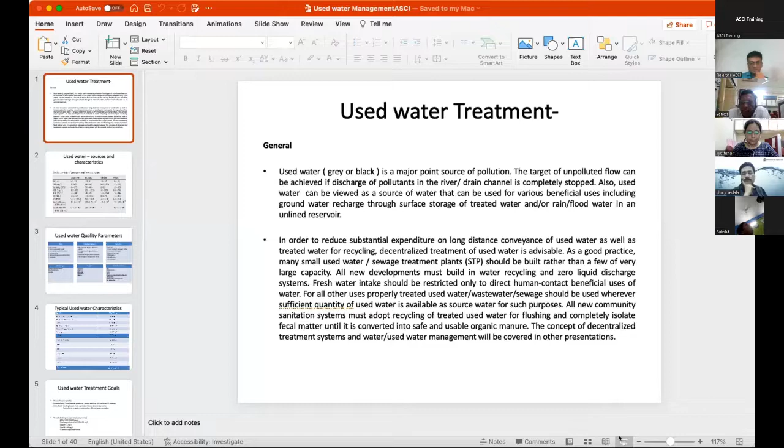What I would like to start my presentation with is that water is a very limited resource. The net water availability, as we see in the days to come, is reducing drastically. It is said that if water availability is about 2,000 cubic meters per person per annum, then we are in a water safe province. Unfortunately, most of us are coming into water scarce and severe water scarce provinces. More importantly, whatever good resources we have, we are converting those good resources into unusable resources because of pollution.

There are 400 lakes in the city I stay, Hyderabad, and none of the lakes are fit for drinking purposes because all the lakes receive a lot of grey water and black water. So it is very important that we stop this pollution and we work out ways and means of treating this water and reusing it.

Fundamentally, we cannot call used water as wastewater. It is also to be considered as a resource. Unless we increase the efficiency of water use, with this increasing population and water demand, we cannot meet the two ends. So it is very important that we treat the used water and reuse it, and preferably, depending on the situation we'll discuss further in the presentation, do it in a decentralized or centralized manner.

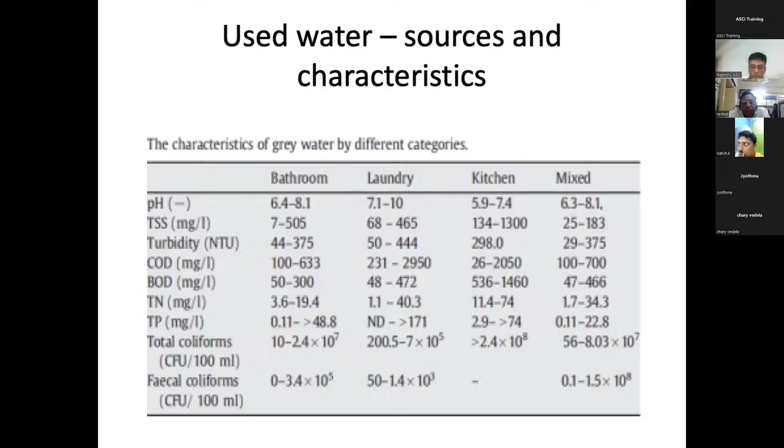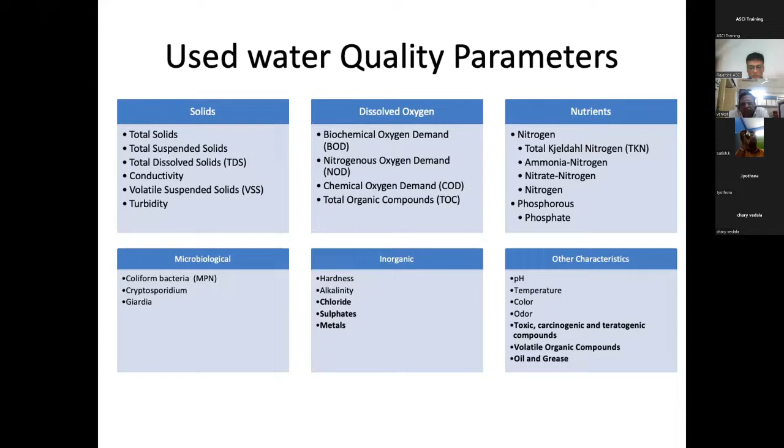Now, in used water quality, the basic parameters of concern - I will use the word used water both for grey water and the combination of grey and black water. Irrespective of that, the used water will contain solids, issues related to dissolved oxygen, nutrients which are also very important from the viewpoint of eutrophication into the final receiving body, microbial contamination, inorganic substances which are very important from the viewpoint of reuse and recycle because inorganics cannot be removed in the conventional treatment process, and other constituents like pH, temperature, odor, color. Not too much difference in these things when we talk about domestic wastewater.

So broadly, if I look into the used water characteristics, I've summed it up in this table, and as I said, the variation is quite large.

Even in a city like Hyderabad, with a population of more than 1 crore, I collected samples from different areas to check the quality of the sewage generated, and it is quite alarming. In some areas, the sewage has an organic load of BOD not more than 50 to 60 milligrams per liter, while in other areas it goes as high as 600 to 700 milligrams per liter. This is a function of the population of that area, the quantum of water supply, and the social lifestyle being adopted.

Now, what do we do with the used water? I have briefed it into two pertinent goals. The first goal is that used water is a resource, not wastewater. We should look into the reuse potential.

Wherever we can have decentralized facilities, we can use treated used water for purposes like toilet flushing, gardening, vehicle washing, groundwater recharge, or cooling tower makeup. In the community I stay, we use treated used water entirely for gardening and to a certain extent groundwater recharge. In a centralized treatment facility, it can be used for cooling tower makeup, especially near a major thermal power station, for industrial purposes, avenue plantation, irrigation, construction, and some aspects of groundwater recharge and recreation.

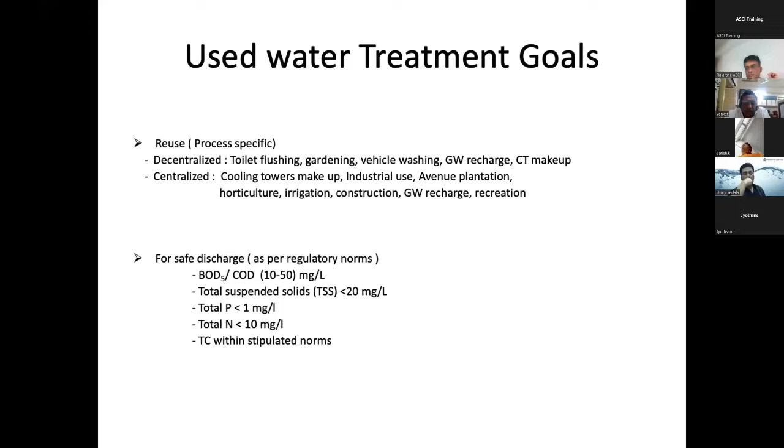There are no standards per se defining that water can be reused if it has this quality or that. I have collected information from different sources. Ultimately, when talking about used water for reuse, the paramount aspects are aesthetics: the water should not have any smell, color, or odor. Added to that, it should not contain any pathogens, and it should not contain inorganics which would result in scaling and other related aspects.

This may be too small for people to see on the screen, so I requested Professor Chary that if we share these things it will be clearer. By and large, used water after treatment can be reused at bulk scale in industry, in cooling towers at power plants, for groundwater recharge, and to a certain extent for recreational purposes. At smaller facilities, it can be given back to the township for toilet flushing, gardening, and related purposes.

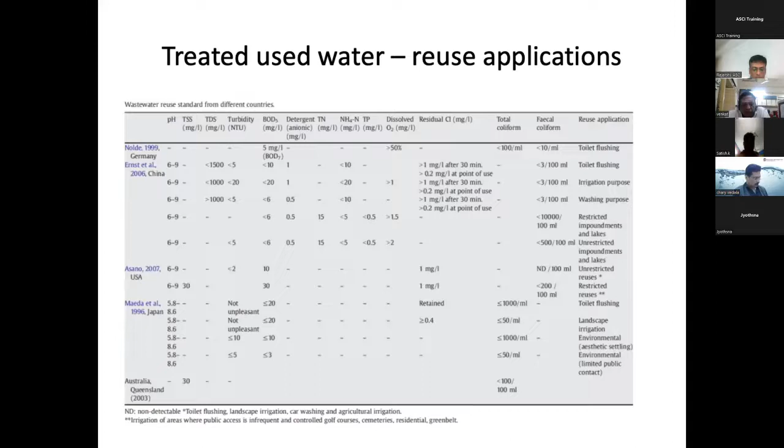However, there's always a stigma attached: people don't want to touch or reuse used water, despite its quality. I have asked several people, would you drink used water if I treat it to levels better than the drinking water you are getting? I always got the answer, mostly, no. But when I tell them that this used water goes into a river, and downstream the population uses it as raw water supplied for drinking purposes, they are a bit aghast—because people just think you open the tap, get water, flush the toilet, and the water goes away. Where the water comes from and where it goes is of little concern to most people.

This is a continuation of the quality of the water. I was looking at the new guidelines provided by the NGT, the National Green Tribunal. Looking at the parameters and characteristics specified for reuse applications, I find that the NGT standards are as stringent, or even more stringent in some cases, than most reuse potentials require. So in our country, if we follow what the NGT is saying, then by and large, most of the water, barring inorganic substances—meaning, in Hyderabad a few years ago we used to get groundwater...

And in groundwater, the TDS, hardness and other things were so high that reuse of that water for purposes like cooling or any other application where scaling is a possibility would have been very, very difficult.

Now, this is a small example I sketched during one of my projects. Normally in most cities, we have rainwater or stormwater drains being used for conveyance of sewage. There are houses near these stormwater drains, and most of them let out their wastewater into these drains.

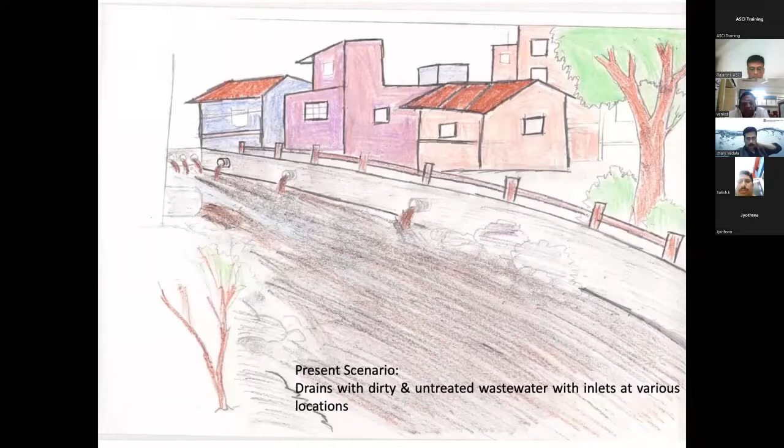So what happens is these drains become perennial drains. They carry wastewater not only during monsoon, but all through the 365 days of the year, and unfortunately, they're carrying wastewater. Because the drains are not properly lined and are not seepage-proof, this dirty water seeps through the ground and invariably meets the groundwater table. In the process, the hand pumps and other sources of groundwater in the near vicinity are all contaminated, and more importantly, the contamination is microbial, resulting in many diseases.

As a matter of fact, one study I was looking at a few years back said that more than 80% of hospital beds are occupied because of waterborne diseases like cholera, typhoid, amoebiasis and other related things. The cost in terms of man-days lost and treatment cost is so high that it has a very good payback period if we avoid this dirty water in the drains.

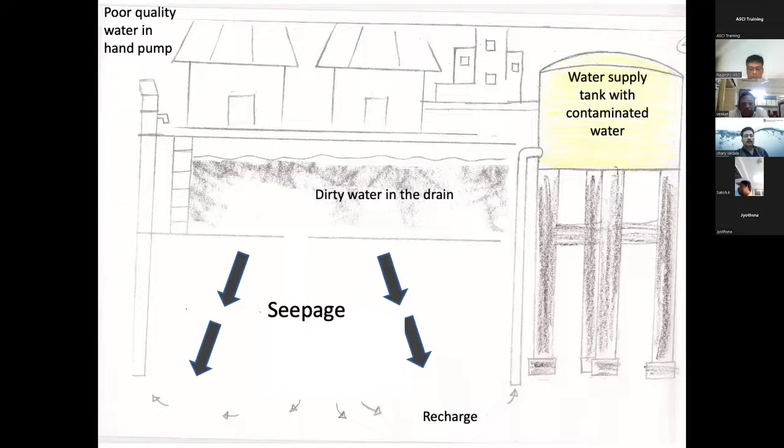And provide clean drinking water to the citizens. So what was thought is to have small decentralized treatment facilities along the drain, and put the treated water into the drain, and not let the untreated raw wastewater, gray or black water, go into the drain, by having some interceptions.

After every certain distance, based on the situation and circumstances, we again have a small treatment plant, and only the treated water is put back — that quantity which is over and above what can be reused and recycled within the nearby areas. So the stormwater would carry only clean water all through the 365 days of the year, apart from rainwater during monsoon.

Now, where to build the treatment plants, especially in urban areas, we have a lot of problems related to space, so different thought processes came in. We can build the STPs underground, like at some public place, and cover it with plantation and other things so it doesn't spoil the aesthetics.

Most of the drains are quite wide, and there's a possibility of constructing small STPs on top of the drain itself. And if there is land available, in a place like Kanpur under the Ganga Action Plan, it was also thought to buy away some of the area where houses are, and construct sewage treatment plants there — pay for it, it's still worth it.

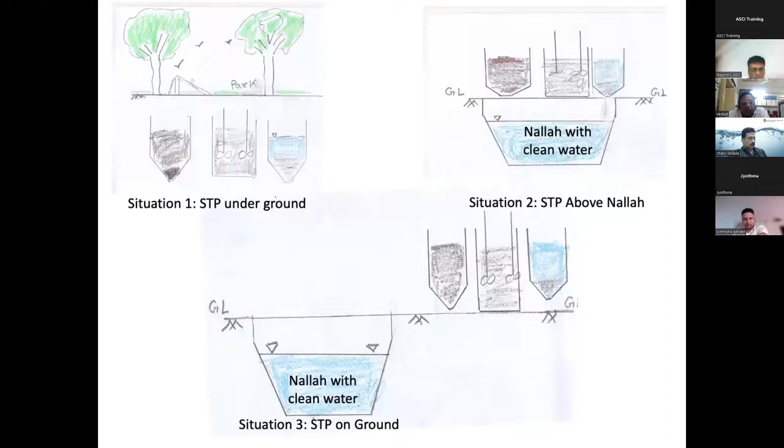The idea ultimately is that stormwater drains should carry clean water or treated used water all through the 365 days of the year. This water can also be accumulated in some artificial water body, or if there's a natural water body around, it can recharge the groundwater.

This water can also be pumped back to places like railway stations for washing of coaches, tracks and platforms. It can be sent back to industry, to power plants, because recycling water from a centralized facility back for toilet flushing and gardening at individual houses is not a practical approach at all. So we have to look into what type of reuse concept can be adopted.

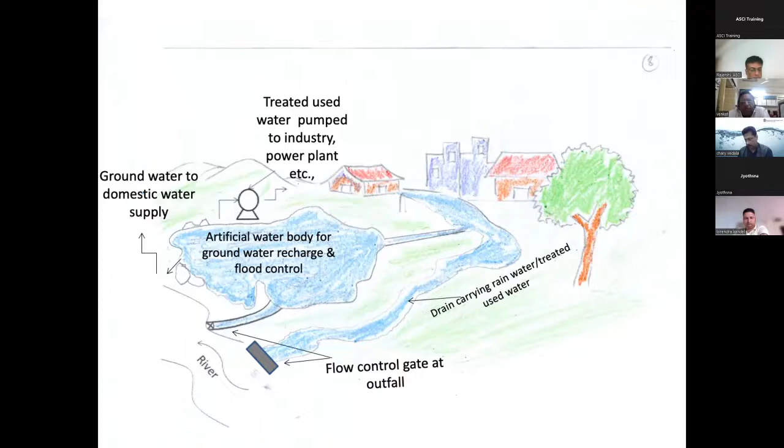And if we put treated used water back into the river, the river ecology and cleanliness are maintained, and downstream users are also happy in the process. So the reuse potential is at power plants, railway coach washing, industry, horticulture, irrigation, etc.

So ultimately, carrying out decentralized or centralized treatment will result in a clean and aesthetic environment all around, and health and related aspects show a lot of improvement, with overall better hygiene. So, as Professor Chary was saying, the major chunk of pollution that is conveyed with the used water should be avoided, and that can be done by providing adequate treatment.

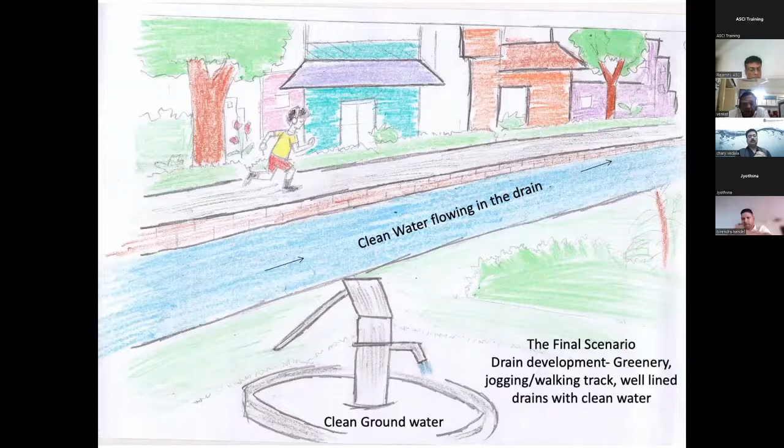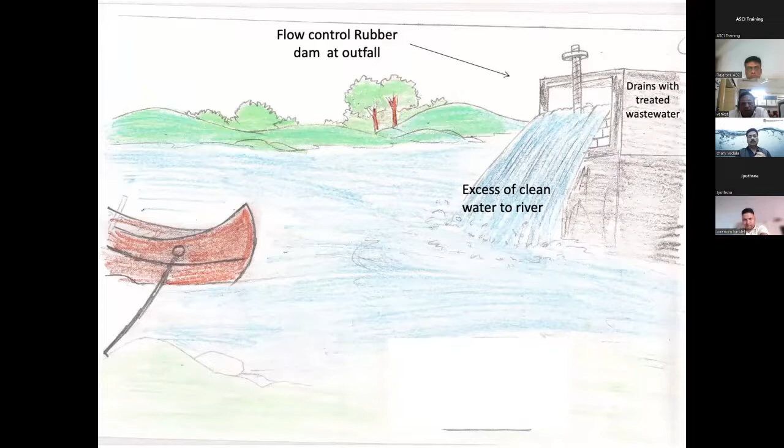Now, how do we select a particular technology or operation for used water? There are various parameters to look into. I can't say one is important and another is not — they all have an equal bearing. The quality of water, the quantity of water, the location where the treatment plant has to be established, availability of land, capital cost, recurring cost, the level of expertise required to operate such plants, and the reliability of the technology we are adopting, and so on. So there are various parameters we need to look into.

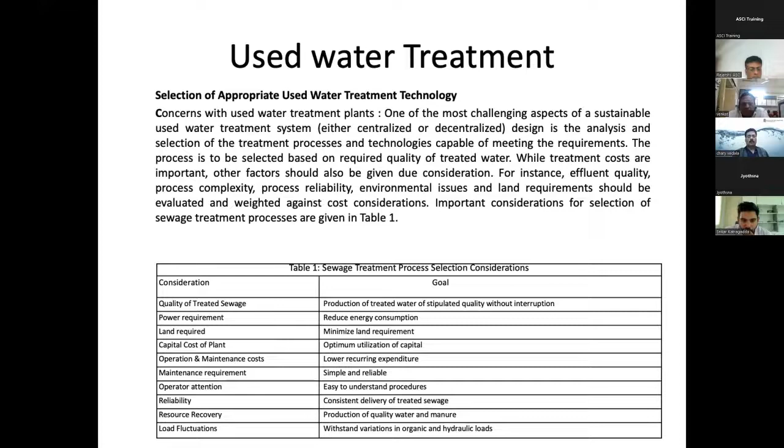In the treatment technology that is adopted, by and large, some fundamental unit operations are a must. Among these are a coarse screen, a collection well from where we pump it further into a fine screen and a grit chamber. Up to this part, it is virtually common whether it is used water, grey water, or combined wastewater, because these constituents are generally found in most used water systems and go undeterred through the treatment plant. Apart from going undeterred, they create problems like choking of pumps, and grit settling down creates a lot of dead volume in the treatment system, and so on.

After this preliminary treatment is over, if you have a dilute strength used water — meaning the BOD is not more than 80 to 90 or 100 at best — you can go straight for physico-chemical treatment, comprising coagulation, flocculation, settling, followed by gravity filtration and adsorption, and finally disinfection. And obviously, sludge management, since we generate sludge in the whole process.

Sludge management is common in almost all treatment facilities. I doubt if there's any treatment facility where sludge generation won't be there — maybe less or more, but end of the day, sludge will be there and has to be treated. How we treat the sludge depends on whether it is physico-chemical sludge or organic sludge. If it is organic sludge, we can convert it into manure by vermicomposting, or if it is primary sludge, we can think of biogas generation from it. If it is secondary sludge, in many cases we just dry it and use it as a soil conditioner. It depends, it depends.

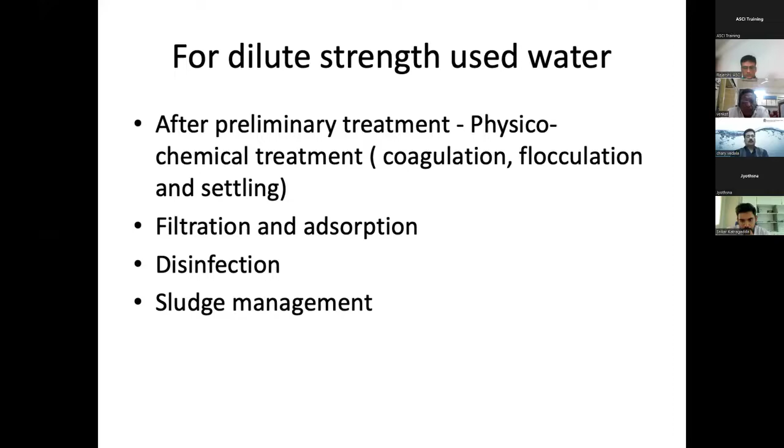Now, used water treatment — fundamentally we are talking about used water, not just throwing away the water, meaning discharging it into one of the receiving bodies. The first objective, as I feel, is that used water should be treated so that we can reuse and recycle it. For this, aesthetics are the most important thing: it should be color-free, odor-free, pleasant to look at, and it should not have harmful components.

When I say harmful components — am I running out of time, Professor Chary? Not yet, sir, you have another 5 minutes. Okay fine, I have no issue — if I'm running out of time, please sound an alarm.

So the basic idea is to treat the water to such a degree that we can reuse it. There are cases — we had this particular project in Hyderabad, where there is a nala known as the Kukatpally Nala, which carries a huge amount of wastewater. It was thought to treat it because the concerned minister and other people wanted that nala to look beautiful, and only treated water should flow into it, given on a PPP model. Now, where does the contractor generate revenue from?

So it was thought that we would go for the normal routine biological treatment, etc., and subsequently adopt membrane technology — reverse osmosis and other technologies — so that the quality of water produced is such that it can be accepted by the industry for reuse at their end. But there was another rider: the rejects coming out from the reverse osmosis plant, when mixed with the balance of the sewage, should not exceed the stipulated standards for discharge of treated sewage. So it's a battle.

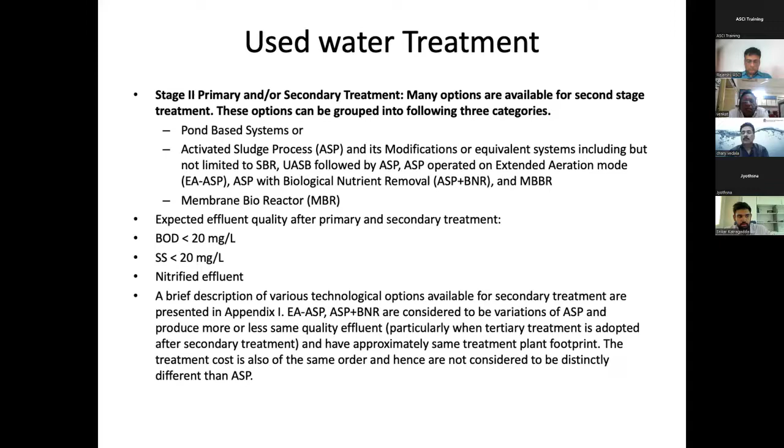Now, among the biological treatment, after the preliminary treatment, we have the primary treatment, which can be with or without primary settling. Normally in small treatment plants, we generally go for an extended aeration system where we don't go for any settling or generation of primary sludge. End of the day, if the BODs are a bit higher, how do you select a process?

It depends on the capacity, as I said. Extended aeration system is supposed to be quite a reliable system, and for small treatment plants, say up to 10 to 20 MLD capacity, extended aeration is reasonably good. However, without going in for tertiary or additional treatment, we cannot take care of certain parameters like the nutrients, phosphates, and nitrogen.

The nitrogen can still be handled by putting a denitrification tank and providing nitrification. Phosphorus uptake is not to such degrees that the end phosphates are less than the desirable level, so we have to go for physicochemical treatment for removing phosphates.

So by and large, irrespective of the type of treatment technology we use, to achieve what is required to reuse the water and to meet the NGT standards laid down now, we have to go for tertiary treatment. Secondary treatment mainly involves biological treatment, which could be only aerobic treatment or a combination of aerobic and anaerobic treatment, because it is in that sequence.

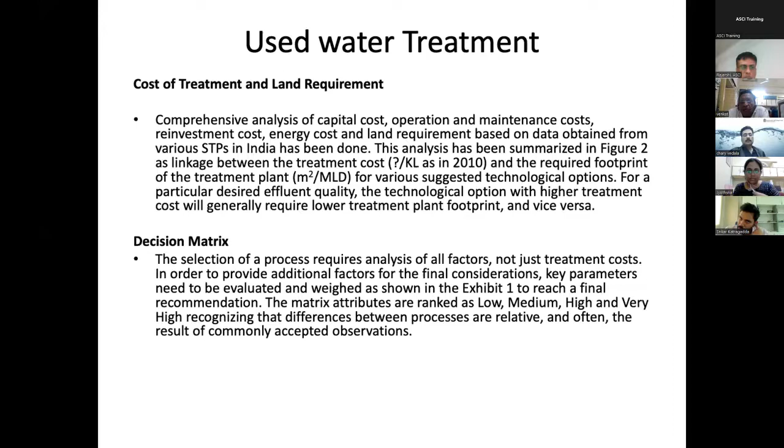And for that, a few suggestions I have - number one, flow measurement. You go to the next slide, please.

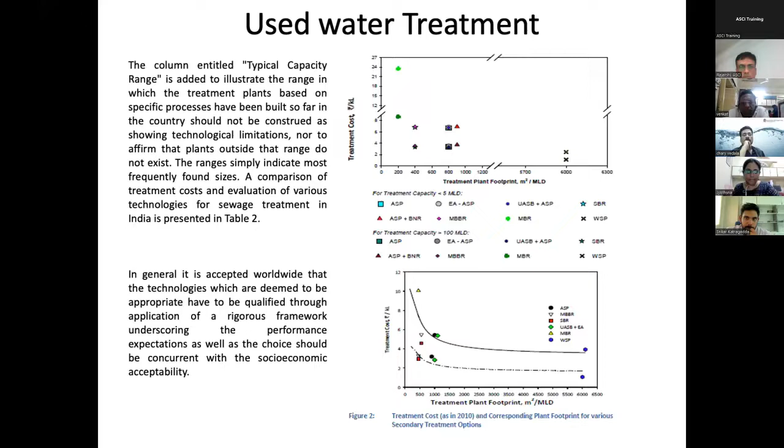Back to continuous measurement of flow at the inlet and outlet. Then very good preliminary treatment is required, and treatment up to tertiary level should be done. There should be an online bioassay test, which is a living indicator. If the treated wastewater is passed through a tank taking about 10% of the flow, certain species are grown there, and their survival itself is an indication of the degree and extent of treatment.

Then in our country, we make another mistake. We design sewage treatment plants for 30 years, the life of the plant, but we never get that flow. So it is always desirable to design and build as modular units rather than going for the ultimate capacity right at this stage.

It's just a suggestion that the pumping stations, the STP, along with O&M together should be taken up as one contract or one system. The reason is, if the pumping station is not working, the STP guy says, what can I do about it, and so on. So to avoid this redundancy, it is best that a single entity or agency is made responsible and accountable for the whole thing.

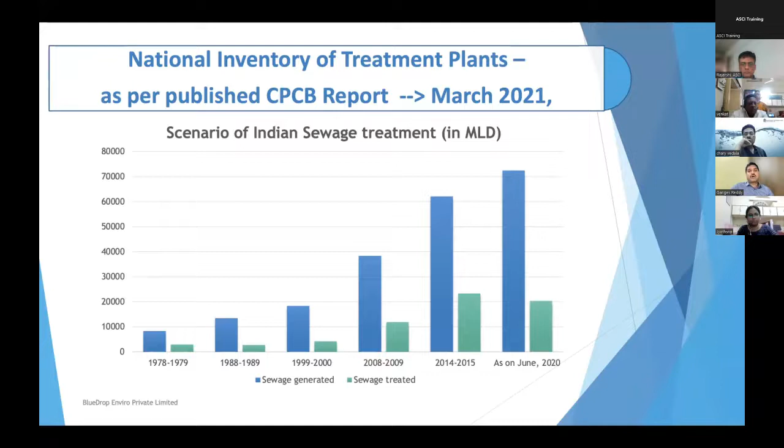I represent BlueDrop Enviro. This report shows the amount of sewage we are generating on average, and the amount of sewage we are able to treat today. In India, we have not even touched 30% of the requirement. Out of the plants set up, as CPCB went on audit - this is the published report from CPCB - out of 1,200 site visits, 10% are totally defunct, they don't exist. And the rest, 77%, are non-compliant.

It's a known fact that STPs are being set up everywhere using different technologies, but unfortunately the fate of these systems is that they are not delivering results. Reasons may be many, but it's enough to say that 77% are non-compliant, and up to 80% of systems are not really delivering. These are the known conventional systems we've set up over the years, whether 1 MLD, 10 MLD, 50 MLD, or 100 KLD.

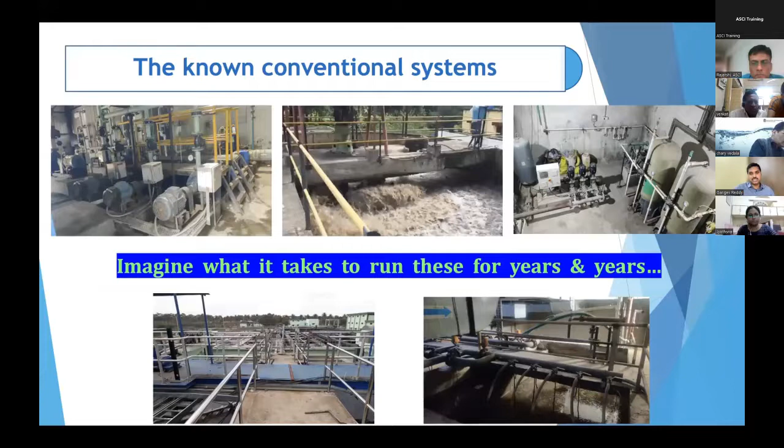Imagine the kind of efforts that take. When you look at these images, the number of moving parts and steel and concrete facilities that go through wear and tear cause enough challenges - constant repairs and maintenance, skilled workforce requirement, high energy bills, sludge handling, odoursomeness in the systems, noise in the systems, and finally you spend a lifetime around it, spending money, putting resources behind it.

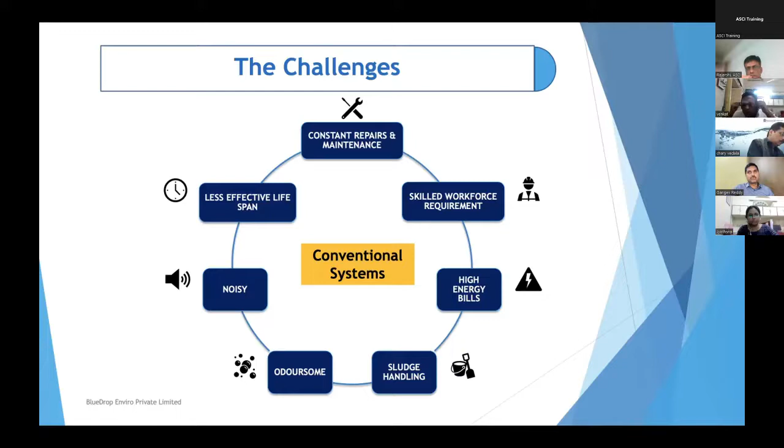What is the effective life - can they work? You build a building, and typically when you ask how long it should last, people say 100 years or maybe 50 years. Your infrastructure that goes along with these facilities or colonies or buildings has to last 50 to 100 years. But I haven't seen any sewage treatment system working for 20 years - very rarely do you find something. Many systems become defunct within 5 to 10 years of lifespan. It's not that the technologies are wrong, but the challenges are many.

If you have to build smart towns and smart solutions, there's a recommendation to look at nature-based solutions. We have been building nature-based solutions in India since 2014. We have built a little more than 70 systems in India, out of which about 50 systems were completely passive, using no kind of energy.

The challenge has been obvious: nature-based solutions require a lot of space, and you don't have as much space in India. So it was very challenging to propagate an effective nature-based solution. We had to look for alternatives, and learned that the Western world has moved forward by integrating nature-based solutions with advanced aeration techniques, which we adopted in India since 2019.

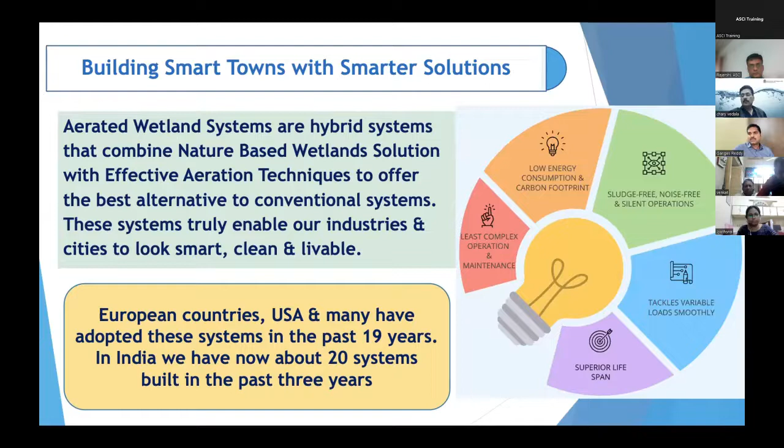Now we have built more than 20 systems using aerated wetland systems, based on forced bed aeration. These systems have been delivering great results in many European countries, within the US, and also in Australia and the Middle East. These systems are less complex, take low energy, are fairly sludge-free, tackle variable loads very smoothly, and have a superior lifespan.

Each of these aquatic plants carries a certain type of root system, and each root carries certain microbial colonies. If you have a dozen different varieties of aquatic plants, they have different kinds of bacteria attached at the root system. These bacteria convert the waste coming into the wetland basin into food for the plant. There is a symbiotic association between the bacteria and the plant, where the fecal matter and organic load get converted and uptaken by the plants as nutrients for their growth. What we don't want becomes food for these plants—this is the nature-based solution where nature has this technology amply available.

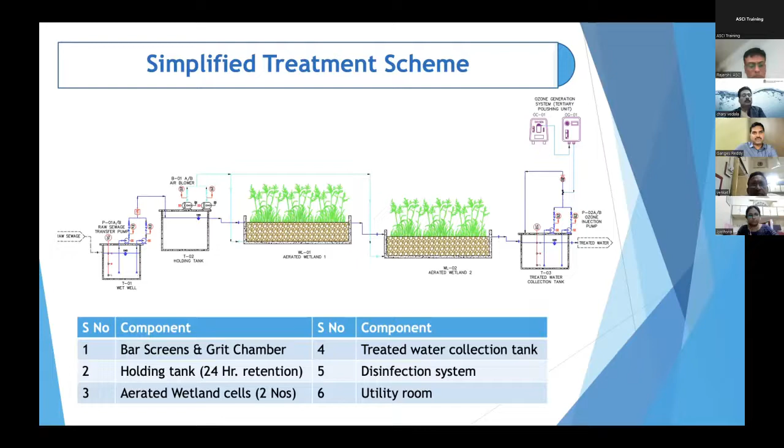This is the 1.2 MLD system we built for Deccan Cements. It has 400 KLD of sewage coming in from the colony and about 800 KLD of their wastewater coming from their blowdown, etc. So the quality of the wastewater is what it is, but I'll show you the treated water quality—this is the quality of the water.

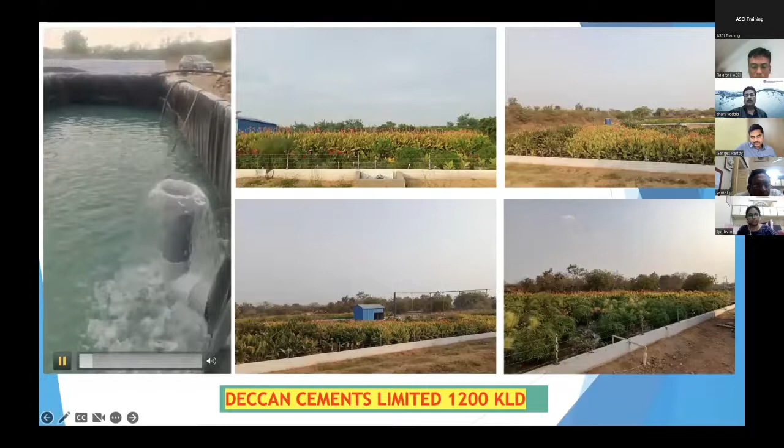Typically, if you want to compare, there are very advanced, sophisticated, good-looking mechanical systems coming to the place. If you look at MBR systems, some of them look like 5-star hotels, very well done recently. But by and large, when you deploy SBR, MBBR systems and compare that with nature-based solutions, I'll show you.

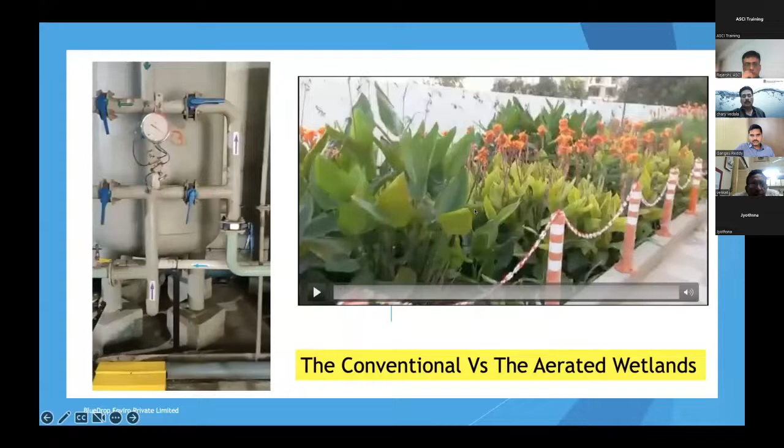So that's, and these are a nature-based solution. It's an aerated wetland system.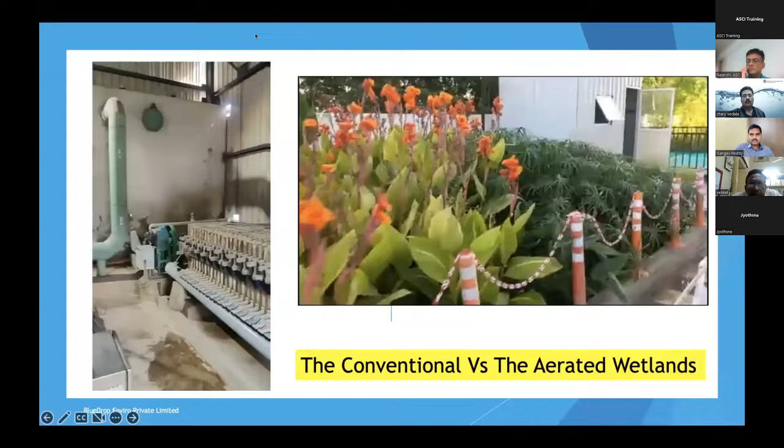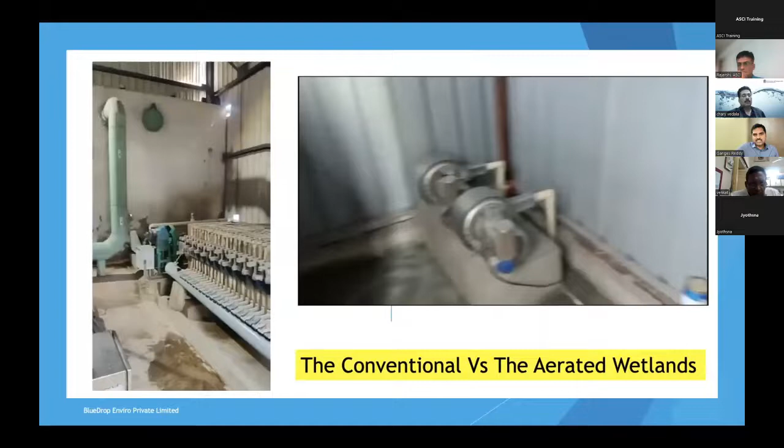That's the ozonator, the two tiny blowers there. So the mechanization we have is very minimal. The energy cost is barely 20% of a conventional system. We run the blowers only for 8 hours, timed blowers that run on their own. When we use ozonation, you need it for flushing, but for gardening you don't need that.

So where can you apply these systems? Lakes and water bodies, municipal wastewater treatment, townships and colonies, hospitals and schools. They're low O&M cost, 50% of conventional systems. They're reasonably sludge-free and simple to operate. There's no odor, no noise around these places, and low energy cost.

When I say sludge-free, there is no accumulation that happens in the wetland very quickly. Usually we design our wetland basins to last 25 to 30 years. There will be slight accumulation in the holding tank, mainly silt and indigestible grit that deposits in the first 2 chambers. Once in 2 years, you may call a super sucker to remove this indigestible sludge, but otherwise we don't find much deposits there. We also dose certain kinds of bacteria into this holding tank.

We typically extract the bacteria available at the root system, convert them, and dose them ahead of time because we've reduced the footprint significantly to meet the space challenges in urban areas today. The video I've shown you is a 150 KLD system built in the backyard of an apartment, about 3.5 meters wide and about 40 to 43 meters long. So within about 140 square meters, we built a 150 cubic meter capacity treatment system.

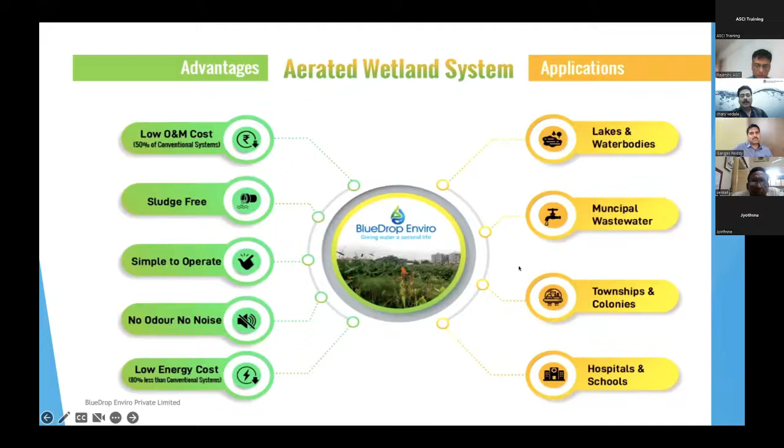We are now building multi-MLD systems using this aerated wetland technology, which has enabled us to treat systems up to 10 MLD comfortably without having to really run around, and the systems look like the other one. You can design them in any forms and shapes, create designs that please your eyes, and integrate them with your landscapes.

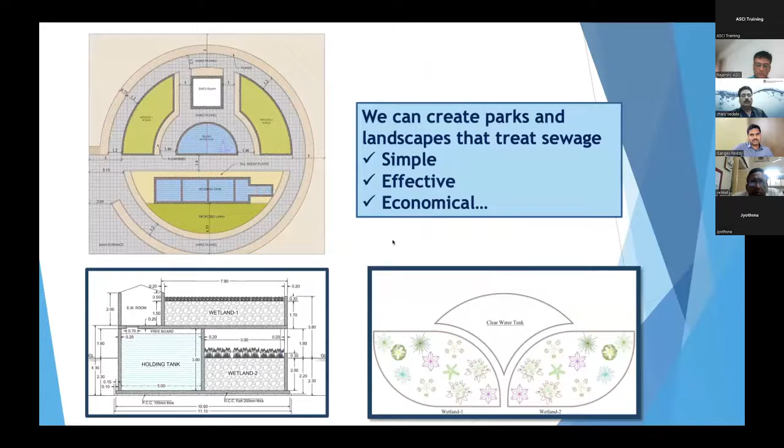So our nature-based solutions are the need of the day, because we need to save the planet from emissions. We need to deploy systems that don't take much power, even better if they don't take any power at all. But no power means we have to substitute with alternatives and reduce the emissions. These wetlands are carbon sinks, they sequester carbon, enhance biodiversity, and directly contribute to ecosystem restoration.

So these are some of the plants we have built. We've done about 70 projects; I'm just showing you a bunch of them. We are working in urban areas, rural areas, and around lakes and water bodies. We've done projects for the dairy industry where BOD levels are 1,000 and COD levels are 3,000, and for a food industry where the loads are similar, about 1,200 BOD and 3,000 to 4,000 COD.

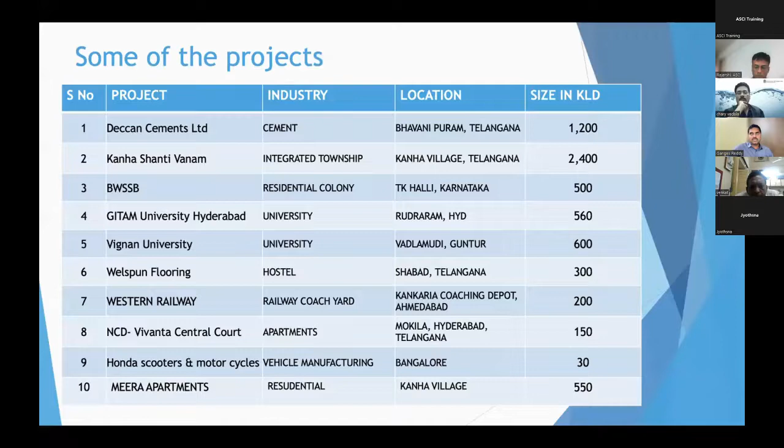It takes a good deal of design and experience to put a system together. It's not that you dig a hole, put gravel and plants, and it will work. It's not just about knowing which plants will work—these are engineered systems. I've seen so many passive wetland systems built in the last 10 years that got choked and became dysfunctional across the country. The science is pretty matured and has design principles. If people know how to design the systems, they would last for the years they're designed for. We design systems to last for 30 years; that's the minimum life cycle we consider.

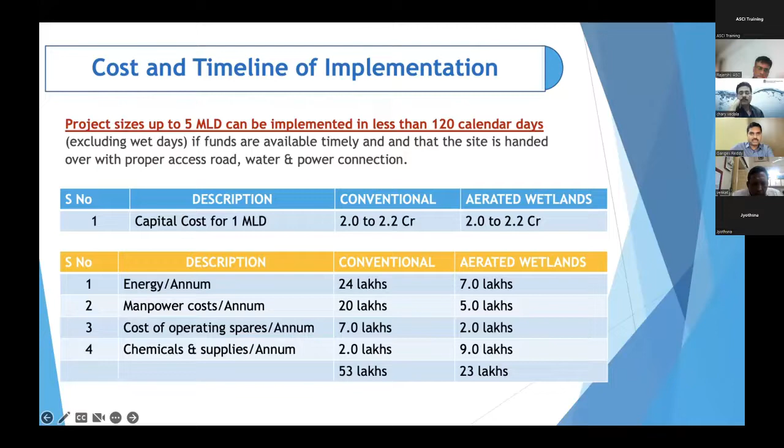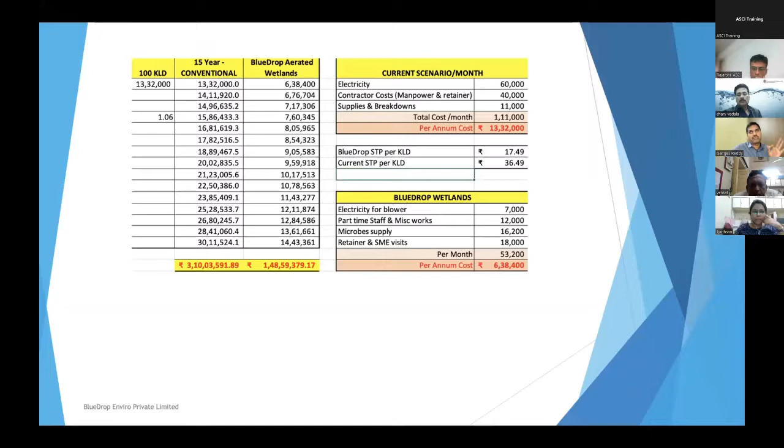Energy cost is 24 lakhs versus 7 lakhs, 20 lakhs versus 5 lakhs, and operating spares 7 versus 2. We have some bacteria cost here. So in spite of all that, we are 55% cheaper than a conventional system. For a typical 100 KLD system, if you look at the energy cost 60,000, the manpower cost 40,000, it's about 1,11,000. I have not included the sludge cost here. So you're talking about this range of expense for a 100 KLD system, 13 lakhs per annum. And if you extrapolate this 6% cost every year, if it works for 15 years, which is a magic, it doesn't work like that. So you're talking about a 50-60 lakh capital cost leading to a 3 crore operation maintenance cost. So STPs are not capital intensive systems. STPs are O&M intensive systems. You put X on the capital cost, you have to be ready to put 5 to 10X on the operation maintenance cost based on the lifetime that you want to run.

So these are the different systems.

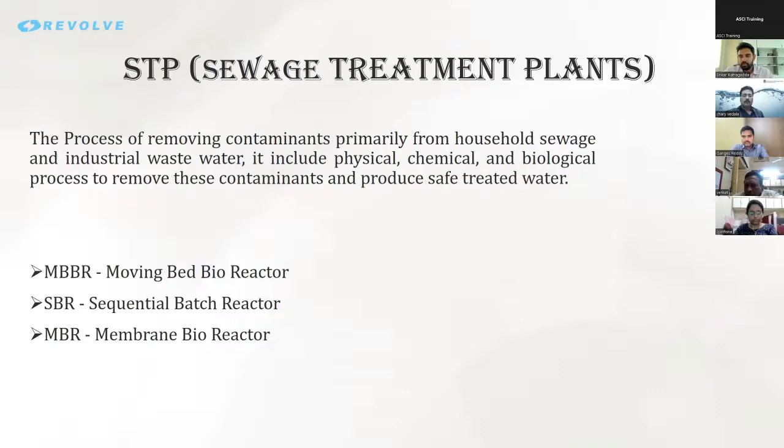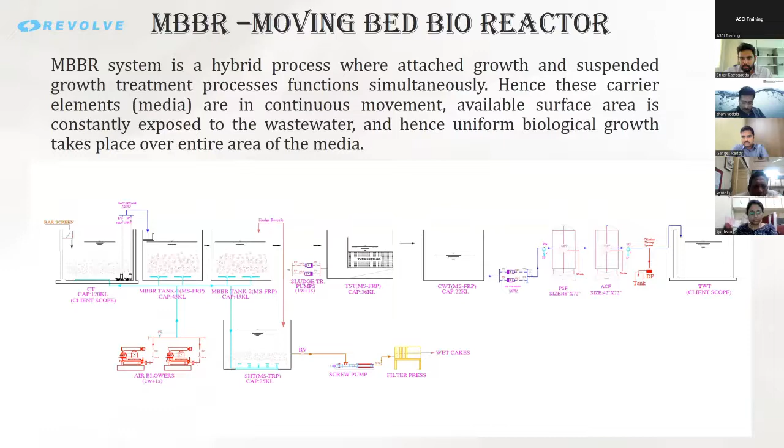Okay, go ahead. So basically some of the sewage treatment plants we have been conventionally using for decentralized systems are MBBR, SBR, MBR, and to a certain extent ASP systems. So as Mr. Venkat Puranam said, there are a few issues with these systems when it comes to implementing large-scale systems, especially in building complexes and things like this. The issues that happen are basically with operation, requirement of skilled labor, and cost for running the plant in terms of electricity and manpower. So I've put down some of the process flow diagrams of how the system is run, but we will skip those in the interest of time. We will just move ahead through the 3 systems through Johkasou. Right there, you can see the MBR system right here. The MBR model actually does nothing for the biological process.

It is in the pre-aeration system, and the MBR just acts like a filter.

Going to the package solution, it's called a Johkasou system. The system itself is designed from Japan, and it's a patented system by the Japanese government. There are a few manufacturers who produce this system.

The intent from the Japanese government for designing this system was to produce a unit that can be connected between small households and larger communities, so that the water being released to the closest drain is also treated. So this system goes from 3 KLD at a minimum, which is approximately the usage for 3 or 4 households, and goes up to 50 KLD.

As is, the system comes in a capsule. It can be a plug-and-play system where only the blowers have to be connected to a main, and the inlet and outlet can be directly connected to the existing sewer line. We just have to find the space, and if there's no space, it is possible to put it above ground also.

Inside, the essential process is that water comes into the separation chamber, as you can see here. It is first allowed to settle, so some of the grit settles. This chamber itself acts as a tiny bar screen - there are bars inside it.

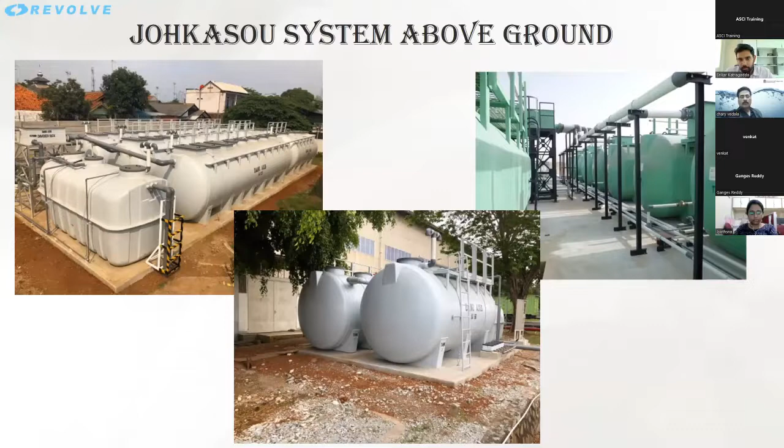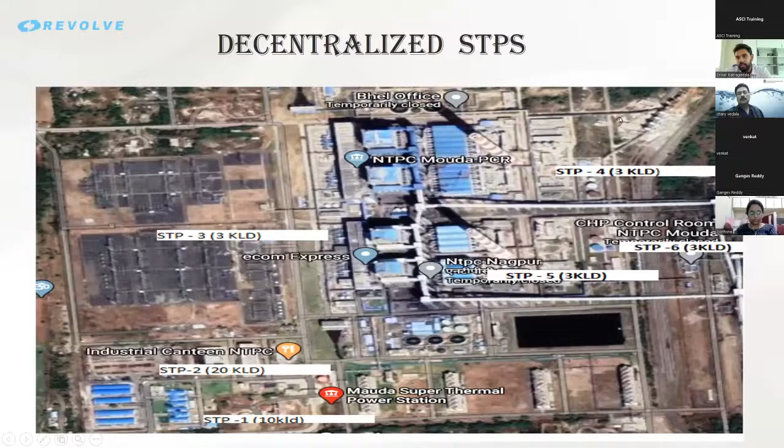In certain sites, we have done systems where they're not completely put under the ground. There is a bund built around it and the system is put above ground here. That is because of the invert level - based on the invert level, we didn't want to use any pumps, so we decided to put the system a little above ground. These kind of orientations can be done.

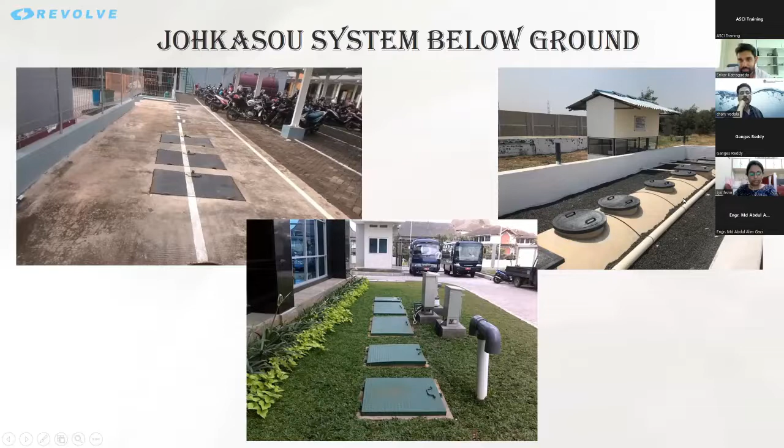Obviously, there are some advantages to this kind of design. You don't need new pipelines or new septic tankers to carry away septage and grey water. If there's a relatively new community setting up a new system, this can be a good solution. Manpower requirement is almost non-existent - the only thing to be done is a chlorine tablet has to be filled once in 4 to 6 days, and the bar screen has to be cleaned once in 4 to 6 days. It's a very, very low manpower cost.

One of the big advantages is when we place these in smaller apartment complexes or smaller hospitals, we tell them we can train a security guard, and if you pay them a little more, they will do the work, and you don't need a dedicated man. I myself have a lot of conventional systems we've executed and are maintaining in and around Hyderabad - some of the biggest systems in Hyderabad, we're maintaining them.

The issue is, if the site we're maintaining is close to 1 MLD, the cost implication on each stakeholder is almost non-existent. But if it's a 50 KLD plant, I remember discussing this with Venkat Puranam sir a few months ago.

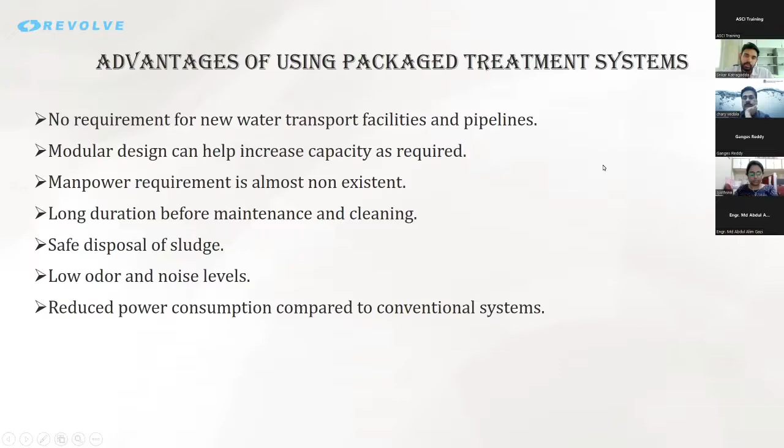Reduce power consumption. There are no pumps we need to use. As long as there's an inline connection, the system itself is very simple and runs by itself. It's run with an airlift pump, so that helps with not using a power connection.

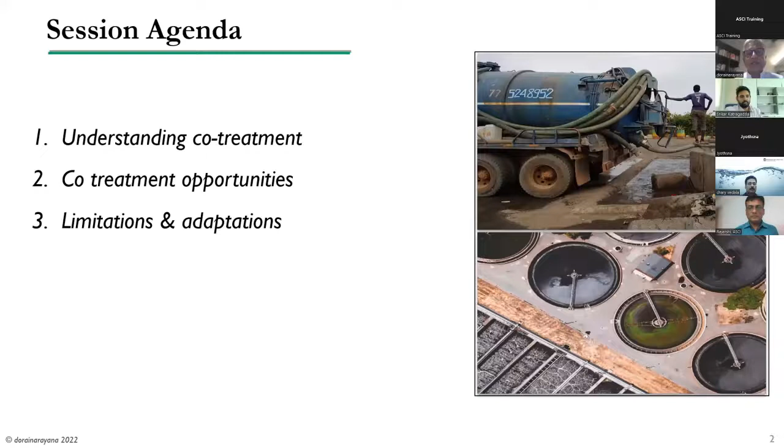So the first thing to understand is that septage and fecal sludge are different from sewage. There was a question just now about Johkasou, whether it can be used. When you do a solid-liquid separation, the liquid part of fecal sludge is closer to sewage. Then it may be possible to treat it in a Johkasou or in a sewage treatment plant. That's what we are talking about.

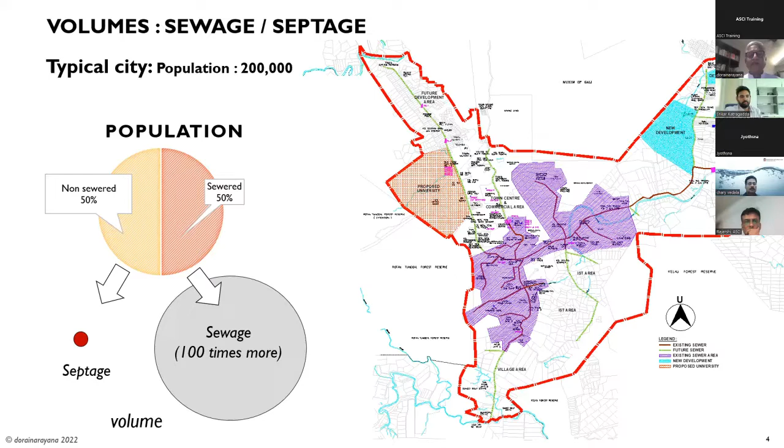This co-treatment we talk about is basically the liquid part of the septage of the fecal sludge. One thing to understand is the volume differences between fecal sludge or septage and sewage. Taking an example where the city has about 50% sewered and 50% non-sewered, the volume of sewage is about 100 times or even more compared to the volume of septage produced by the same population, assuming regular desludging. So sewage volumes are far higher than septage volumes from an equivalent population.

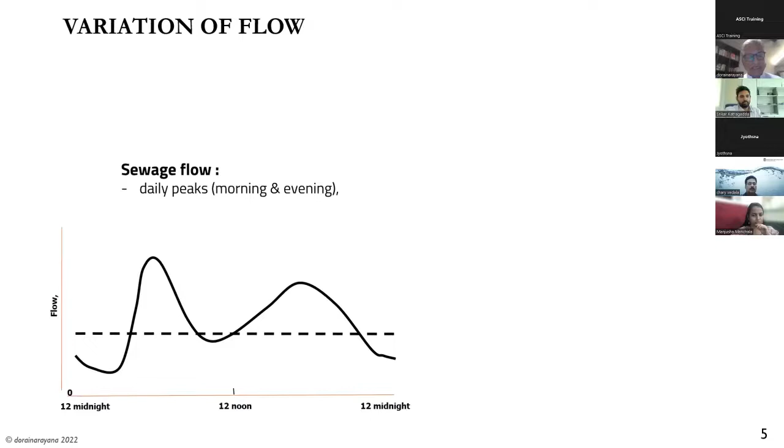Now, what happens when you combine this in a co-treatment situation where sewage is continuously coming into your STP and you then bring in trucks? One more point is that these trucks only arrive during working hours, maybe 9 to 5. So for the remaining part of the day or night, there is no flow of septage—it comes in only during this time.

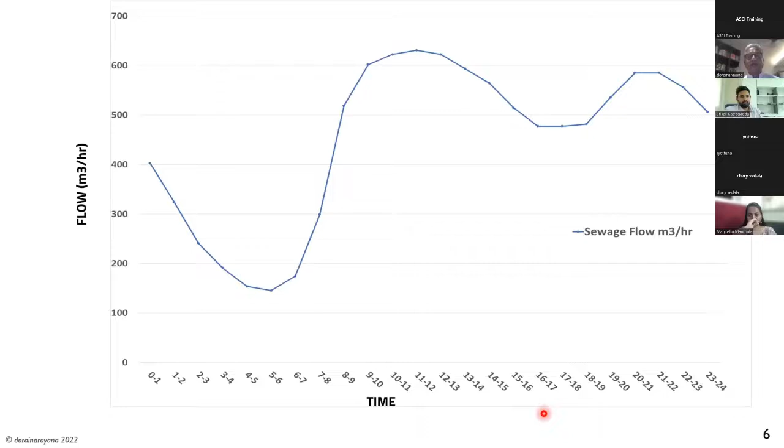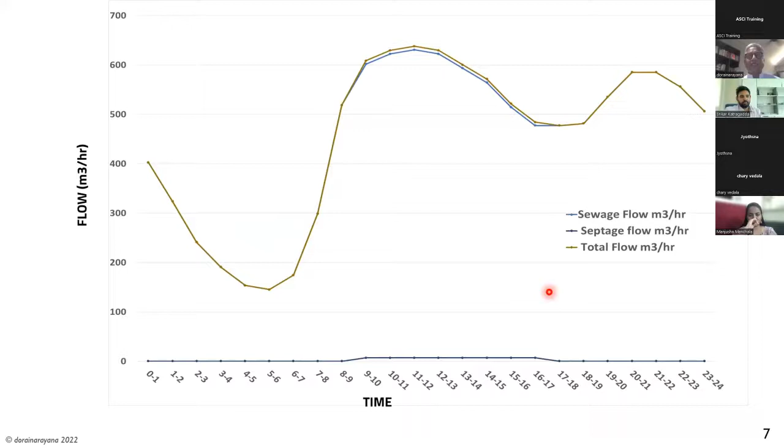Now what is the impact of that? This is the sewage flow pattern we saw earlier, similar thing on a larger scale. If we superimpose the sludge flow here, you see it's negligible—the difference is negligible. So what we're trying to say is that in terms of volume, adding septage usually does not make a difference. The flow itself is not the consideration. A lot of times we say we're going to add 1% of septage and so on, but it's not really the flow that matters, but more of something else, which we will see.

So we are now going to look at the concept of concentration and loading. We are used to expressing BOD in terms of concentration, either ppm (parts per million) or milligrams per liter. But in designing co-treatment, what is more important is the loading, obtained by flow multiplied by concentration.

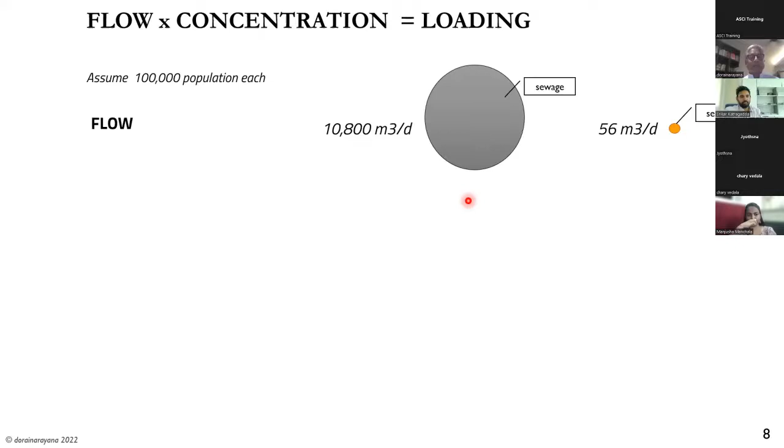For example, take the flow from 100,000 population—1 lakh population sewage, and equivalent 1 lakh population septage, which is 56 meter cube, far smaller. Now look at the concentration of suspended solids: sewage is typically about 300 milligram per liter, and I'll take an assumed figure of 7,000 milligram per liter for septage. So the volume of sewage is much higher than septage, whereas the concentration of suspended solids is much higher in septage compared to sewage.

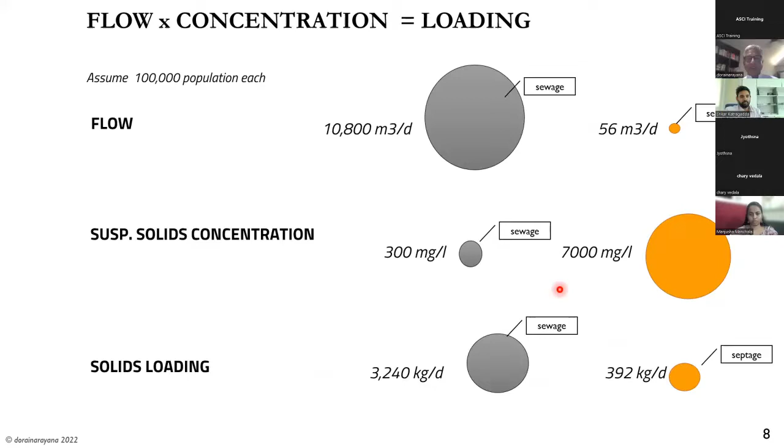But when you want to talk about the impact, you must look at the loading, multiplying flow times concentration. You get 3,240 kilograms of suspended solids from the sewage, and for the same population, 392 kilograms from septage. Now you can compare and say the suspended solids contribution from septage is slightly over 10% of the sewage contribution, even though the volume is very small. So in designing co-treatment systems, this is the main thing we must consider—the loading rather than concentration.

And for BOD, nitrogen, COD, everything, similar ratios apply—you multiply flow times concentration to get the loading, and that's what you look at. Now let's look at the variation of flow over the day. In this case, this is the variation of suspended solids over the day, in kilograms per hour. Just now what we saw was the total over the day; here we are looking at the instantaneous value per hour.

This is the variation, and it follows the variation of the sewage flow, because when the flow is more, there's more suspended solid coming in, right? Plus flow multiplied by concentration.

When you add the concentration of suspended solids contributed by the septage, this is what happens. For this period of the day when the tankers are coming in and discharging, there is a substantial increase in the kilograms of suspended solids per hour at any time. Here there's no difference because there's no septage being brought in, and here too. Whereas during this period there is quite a bit of difference. So even though over the day it's not that much, the flow is not that great, and the concentration over the day is also not much, but on an hourly distribution it can be different.

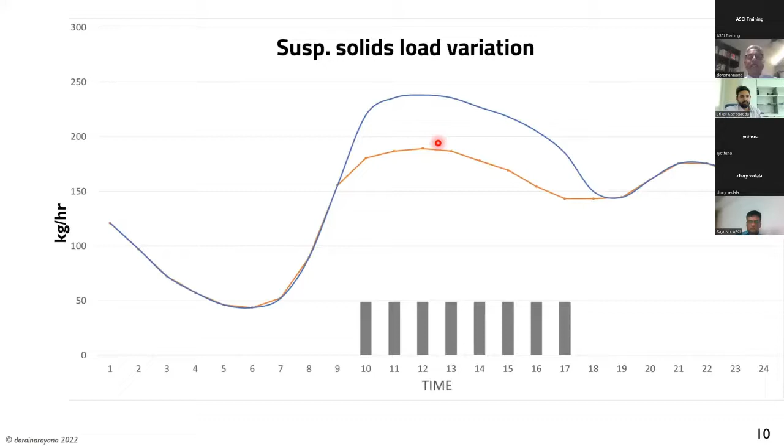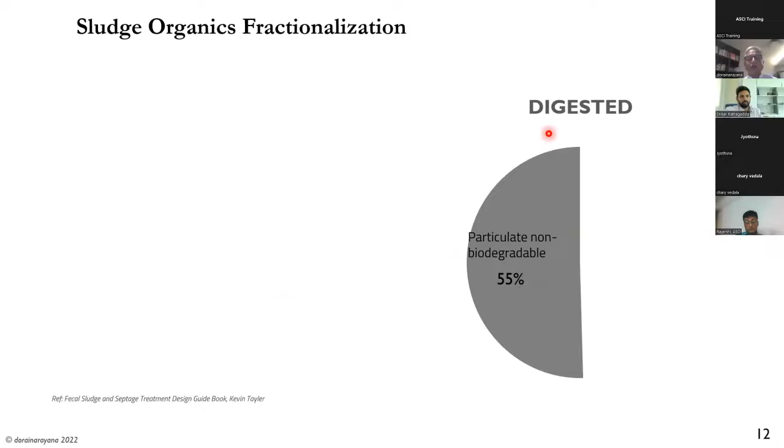Now let's look at the organics part. It's another very important thing that when we talk about septage or fecal sludge, there are two types. One is digested septage, another is fresh septage. What does it mean? Digested septage has remained inside your containment for a substantial period of time and has already undergone some level of stabilization. Whereas fresh septage is being dislodged from the containments on a more frequent basis. Maybe it's a communal septic tank, a community septic tank, or a public toilet septic tank, and then it's called fresh.

What's the difference? In the digested septage, there's a very high percentage of non-biodegradable and particulate matter. This part, which is slightly more than half - I'm just taking an indicative figure - cannot be treated in a biological system because it's non-biodegradable. So you need to remove this thing. How do you remove it? Through a solid-liquid separation, because it's particulate, this will separate out in a solid-liquid separation. And you are left with only the remaining part that you have to co-treat in your treatment facility.

Whereas when you have a fresh sludge, you cannot do that, because the readily biodegradable and slowly biodegradable part constitutes about 90%, and only a small part is particulate and non-biodegradable, which means you need to do something about this first before you co-treat. So this is indicating to us that depending on what type of sludge you're bringing in - is it digested sludge coming from pits or septic tanks which are being dislodged on a few years basis, or is it fresh sludge coming from septic tanks or containments being emptied very frequently - you may want to deal with it slightly differently. Let's see what we do.

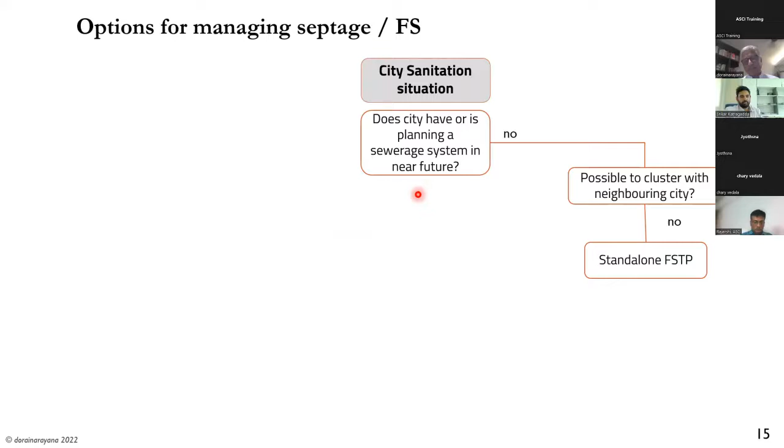So this is a full pie chart. When we look at options now, so you have a city. Does the city have a sewerage system already, or is it being planned? If not, then there is no opportunity to co-treat there, but you might have some neighboring cities where you can send the sludge to and cluster it, or you need to just put a fecal sludge treatment plant, a standalone dedicated one.

If yes, then if it's a new STP being planned, you can evaluate the logistics, which means how far is that new STP from where the sludge is being generated, because your sludge is going to be transported by tanker. So look at that sludge and then just design this new STP to co-treat. Relatively easy and straightforward, right?

But if you have an existing STP, then again you have to evaluate the logistics and look at available spare capacity. If the STP is already almost fully loaded or expected to be fully loaded in the next few years, co-treatment is not an option. If not, then you can start looking at what technical constraints exist in this particular STP, and whether you need pre-treatment of your sludge or some modification or retrofit of the STP before you co-treat. This is broadly the kind of flowchart you would go through, and these are not mutually exclusive things.

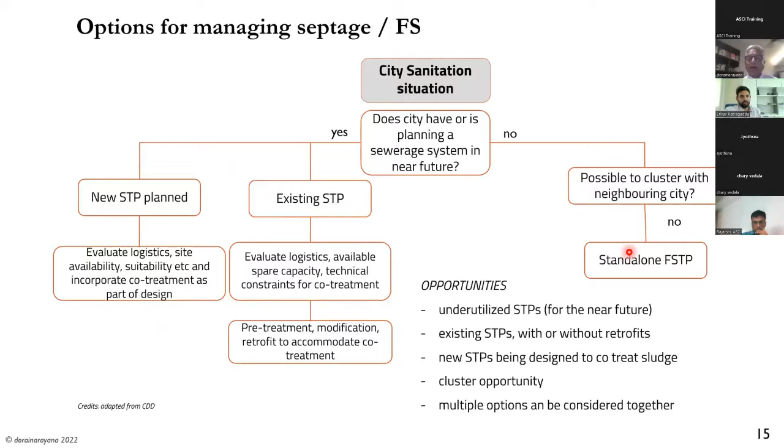And there could be options where all three could be done in STP. Part of the septage could go to new STP, part in existing STP, and part in standalone FSTP. So it could be a combination of these. So when you have a dedicated STP, these are the options.

If you have either a dedicated FSTP or co-treatment or a combination, it can mean interim co-treatment, whereas a permanent arrangement is for an FSTP, or it could be the co-treatment itself is permanent, which means you intend to keep it for good.

Logistics are important, and the remote addition of sludge at pumping stations or manholes—we need to be very cautious and need a proper decanting facility with some kind of screening and maybe some solid liquid separation, with monitoring so that illegal discharges aren't abused and don't cause problems to your sewage system. So the logistics problem can be overcome by these decanting facilities, provided they are designed well.

The crude addition is when you just take your raw septage coming from the tankers and add it directly into the inlet of your STP. I would advise very strong caution not to do this unless you are very sure it's a very small quantity unlikely to affect your STP. It is much better to do it after some kind of pre-treatment, or even if it is already very dry, you can do a direct dewatering.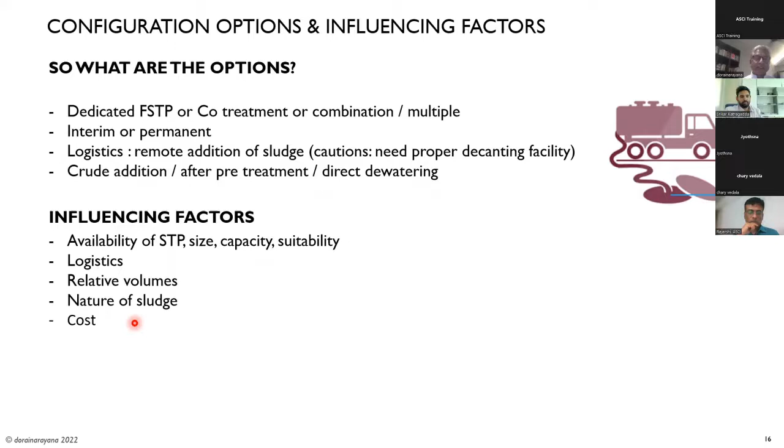So the influencing factors are the availability of the STP, the size, the capacity and suitability, the logistics, where it's located, the relative volume of sewage flow compared to septage flow, the nature of the sludge, and cost, of course. What is better—to have a separate FSTP or to co-treat with some modification?

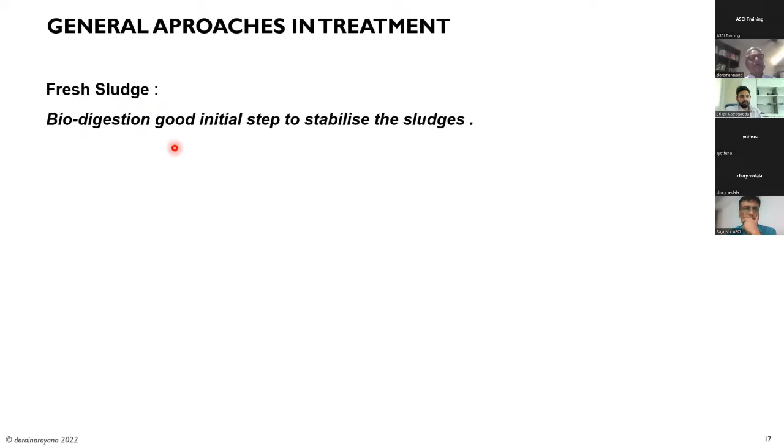When you have fresh sludge, we saw what that was, right? So the first step before you co-treat is biodigestion. You should have an upfront digester to stabilize the sludge before you go in for co-treatment.

Whereas if you have septage coming from septic tanks, leach pits, and so on, where it has low biodegradability but is mainly particulate, then a solid liquid separation is advised upfront before you co-treat the liquid portion. The solid liquid separation will remove quite a bit of the pollutants as well.

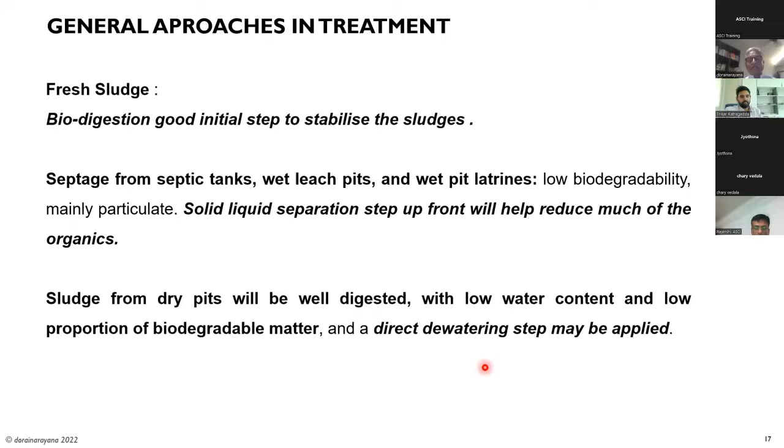If it is dry pits, which are not very common in India but common in places like Africa, where people don't use water for ablution and are also in water-stressed areas—these are dry pits where the fecal sludge is well digested with very low water content, and also the proportion of biodegradable matter is low. Then you can actually do direct dewatering steps. If you have a drying bed, for example, you can apply it directly there.

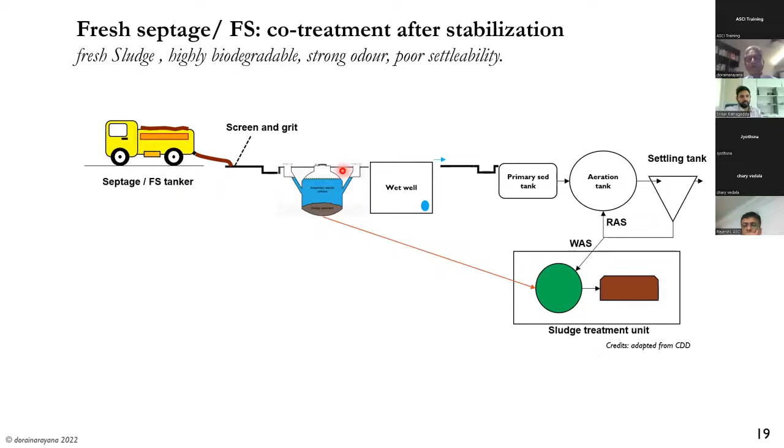So this is just what it shows. This is a crude one, I should say—you just have the STP and add it in here, without any pre-treatment, without any digestion. Here is a digester that you have upfront for fresh sludge. You add it here, digest it, and the sludge goes to your STP's sludge stream, and the liquid then just flows through together with the sewage.

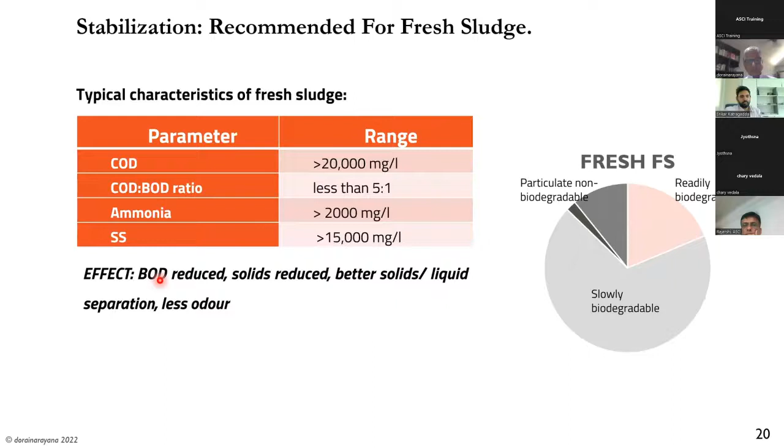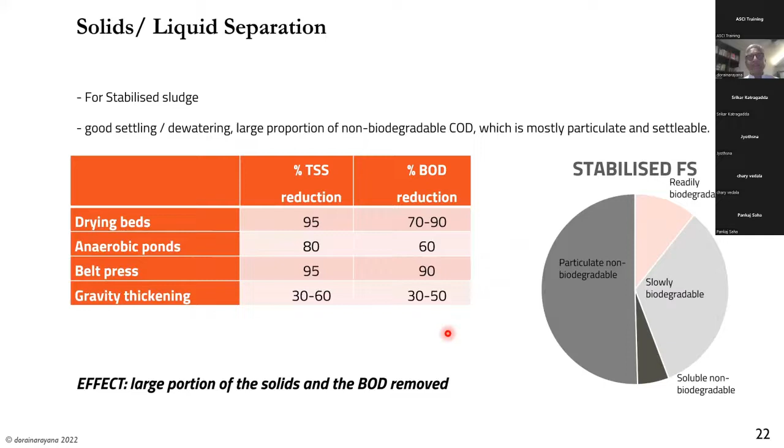You can see here, when you do a solid liquid separation, depending on the type of method you use, the total solids reduction and BOD reduction can be very substantial. So you're only left with the remaining part to be co-treated, which brings it much closer to sewage characteristics. This is what I would recommend for most areas where you have stabilized septage coming in—try to have a solid liquid separation before co-treatment.

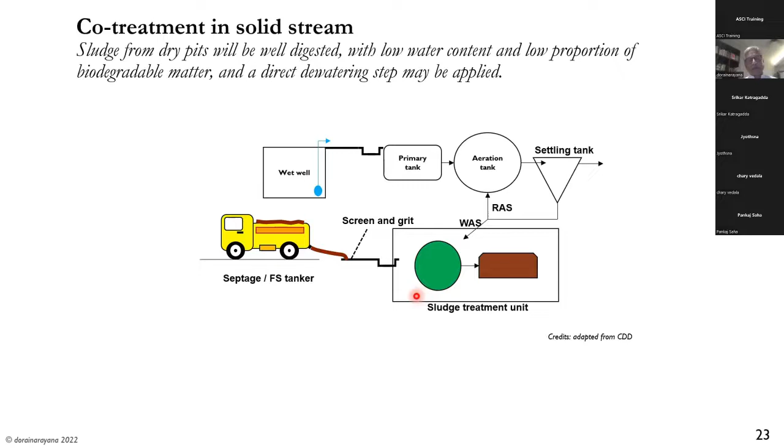And this, of course, is a direct bringing in of sludge, adding it directly to your drying bed or whatever sludge treatment unit you have.

Some of the technical limitations you will still face when you do liquid stream co-treatment: the process units have some design limitations. The hydraulics usually aren't a problem because we're adding very small quantities. The solid loading could be a problem, the organic loading could be a problem, and the oxygen requirement could be a problem.

The options are: we can either limit the quantity of septage we're adding, pre-treat it to bring the sludge characteristics closer—this pre-treatment would include either solid liquid separation or digestion—or you can retrofit your limiting process in the STP, adding some process steps, adding aerators, for example. So you could do any of these things to retrofit in order to co-treat.

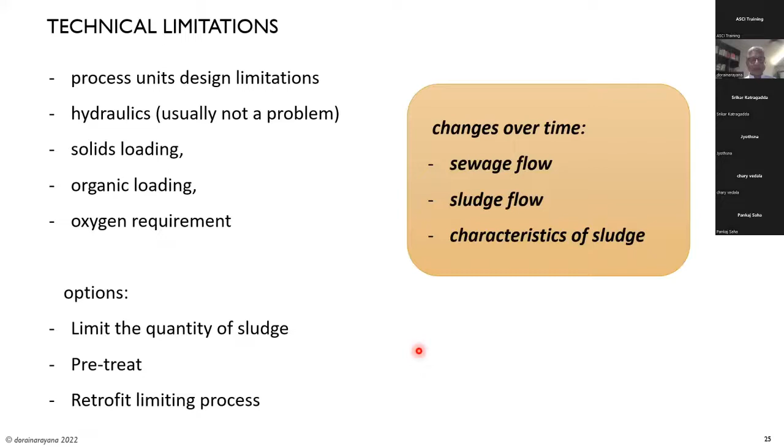Need to remember that all these things, the sewage flow, the sludge flow, and the characteristics may change over time. So we are not doing a one-off thing, but you have to keep monitoring what happens over the period of time that you're doing the co-treatment.

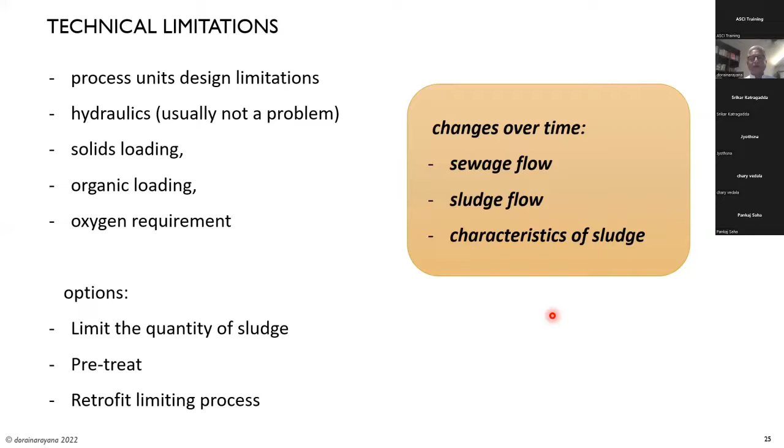Higher oxygen uptake for nitrification—this is in case you have nitrification, denitrification steps—and unavailability of sufficient organic carbon for denitrification, in the anoxic zone of your STP. Again, solid-liquid separation will mitigate quite a lot of these issues that you might face in your liquid stream.

Oh, I forgot to mention this. Earlier we saw that we have fresh and stabilized sludge. Some cities may have a combination of this, so there are options of either blending these or having two separate streams, depending on the relative volumes you're dealing with. Reduce the volume added, monitor the quality and regulate tanker operators—this is in case of any toxic stuff coming through the tankers.

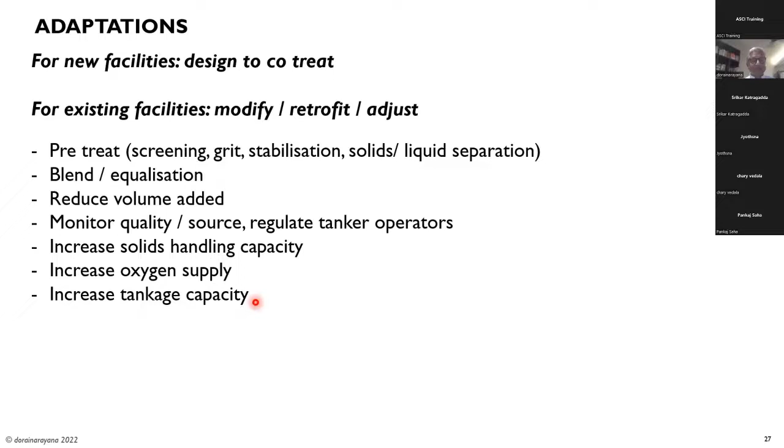Increase solid handling capacity, primarily in your primary settling tank and so on. Oxygen supply can be increased, and tankage capacity is quite difficult to do by adding tanks or increasing tank size, but this is last resort.

Final words: start small. Whatever analysis you do, don't take chances of fouling up the STP, so start with small quantities and gradually work your way up. Select large STPs—don't go for co-treatment in small STPs where process control is low, may not be manned, and chances of things going wrong can be very high. Select large STPs with sufficient spare capacity over the planning period, at least for 5 years.

Be cautious of end products. If you are using the end product, either the water or the biosolid from the STP for certain purposes, for example composting, and you're co-treating sludge that you bring in, you may not be in control, and there might be some industrial stuff there which makes your end product difficult to reuse. Logistics—I mentioned about the remote decanting stations.

Planning for co-treatment on a cluster basis is always very good, because when you have an STP in a big city, try to have co-treatment of sludge from adjacent smaller towns. One issue I face is institutional issues, where if the sewage treatment plant is operated by one entity and the septage management is by another entity, they find it difficult to talk to each other. So this may be one issue that you may face.

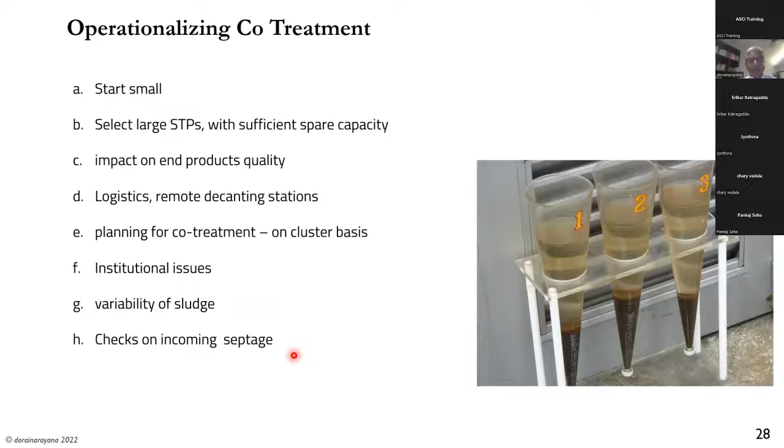All right, so I'm going to stop here and open up for any questions. I see some in the chat already, so shall I take those first?

Sure, sir, please. So we have centrifuges at most STPs—is it desirable that the septage is dewatered along with the STP sludge and the decanted liquid taken for treatment?

Sometimes it's a matter of looking at the characteristics of the sludge. The STP sludge that comes out has quite a different character, especially if it's from an activated sludge plant—it can be very fluffy and difficult to dewater, requiring more polymers or different types of polymers. So depending on the quantities, if small, you could do it together. But if large, it might justify a separate centrifuge or even a drying bed for the sludge from septage.